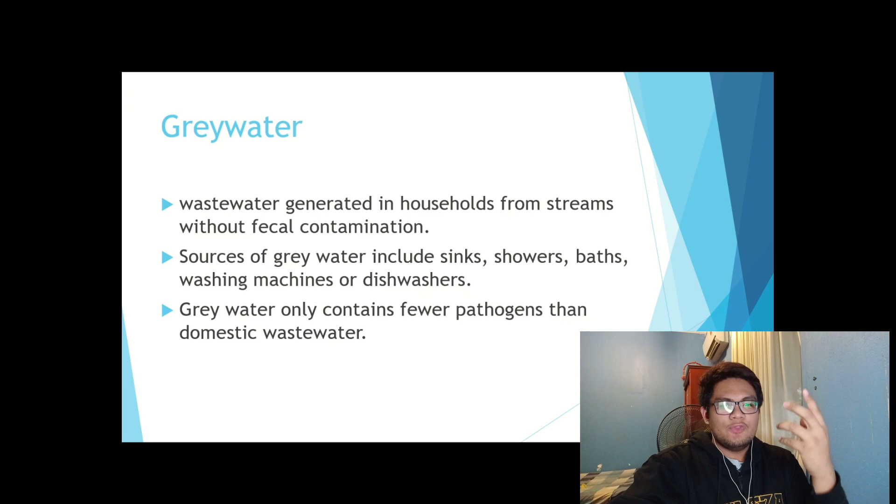For stormwater, it originates from the rain, including snow and ice. Stormwater can soak into the soil, be stored on the land surface in ponds and puddles, evaporate, and contribute to surface runoff. Most runoff is conveyed directly to nearby streams, rivers, or other water bodies without treatment.

In natural landscapes such as forests, soil absorbs much of the stormwater. Plants also reduce stormwater by improving infiltration, intercepting precipitation as it falls, and by taking up water through their roots.

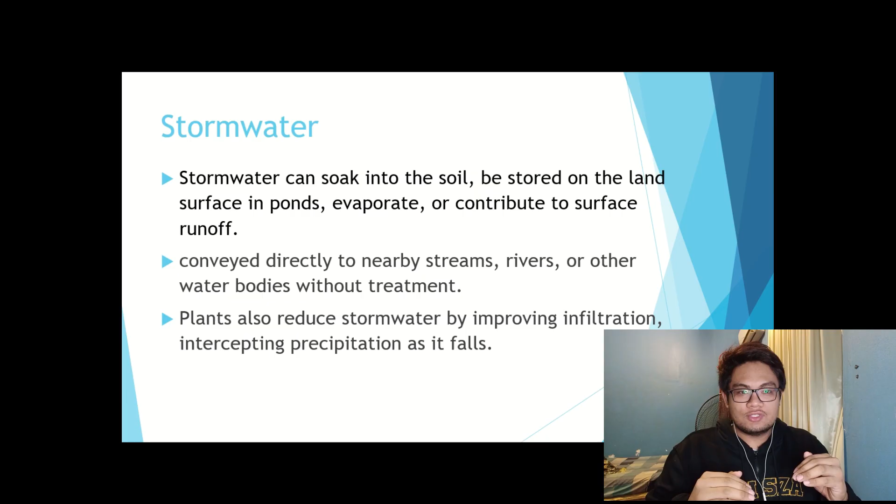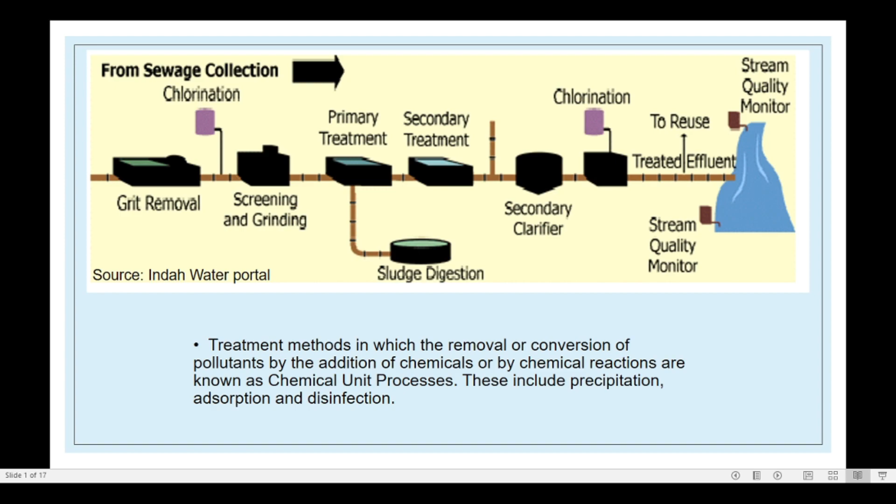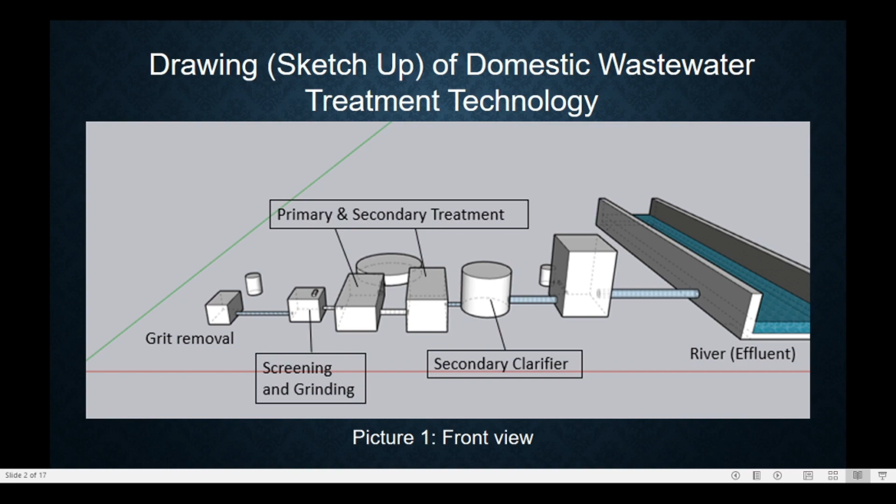For preliminary wastewater treatment, it is for the removal of coarse solids and other large materials often found in raw wastewater. Removal of this material is necessary to enhance the operation and maintenance of subsequent treatment units. This includes screening and comminution or grinding for removal of debris and rags, and grit removal by sedimentation.

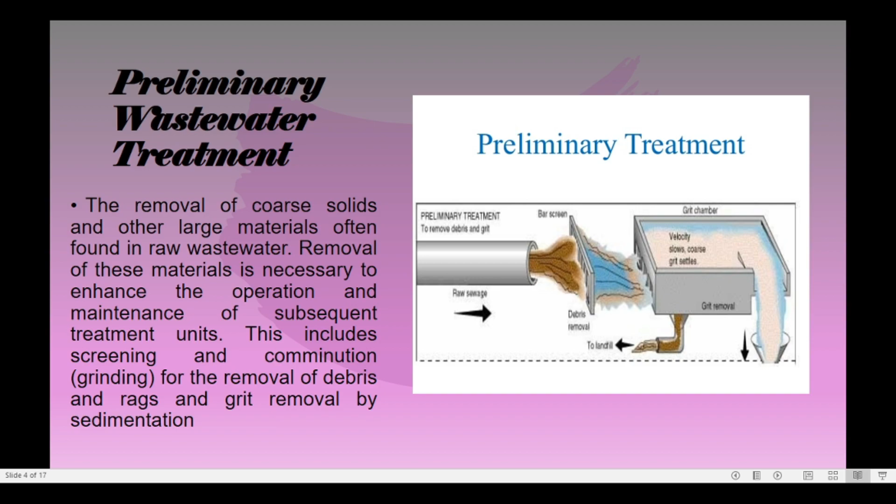For grit removal, it's used to remove sand, silt, and other heavy solid materials that are heavier than the organic biodegradable solids in wastewater. Grit removal is often found in the headworks of a wastewater treatment plant. It can also be used to remove sand from river water intakes prior to processing for potable water, used in industrial applications to remove fine abrasives, as well as being used to remove grit entrained in sludge.

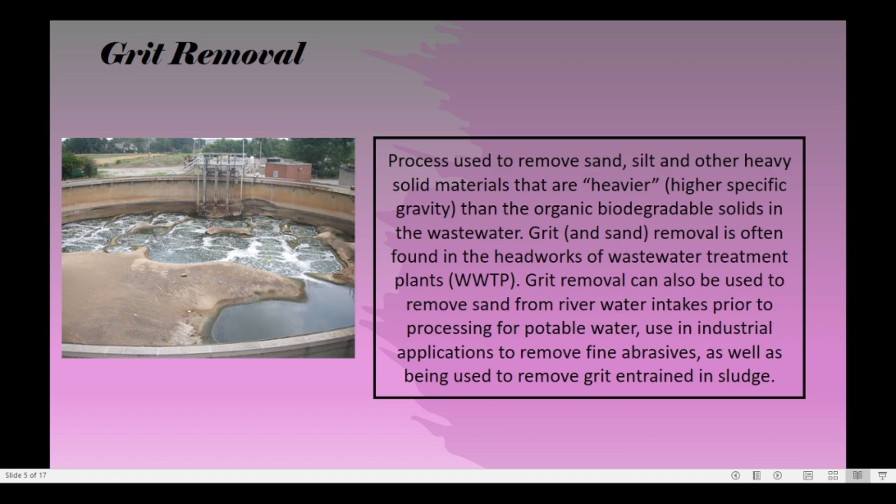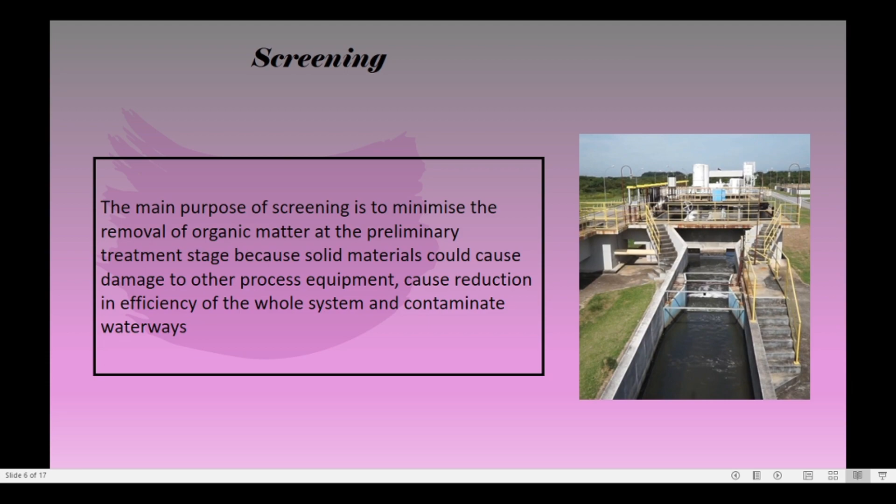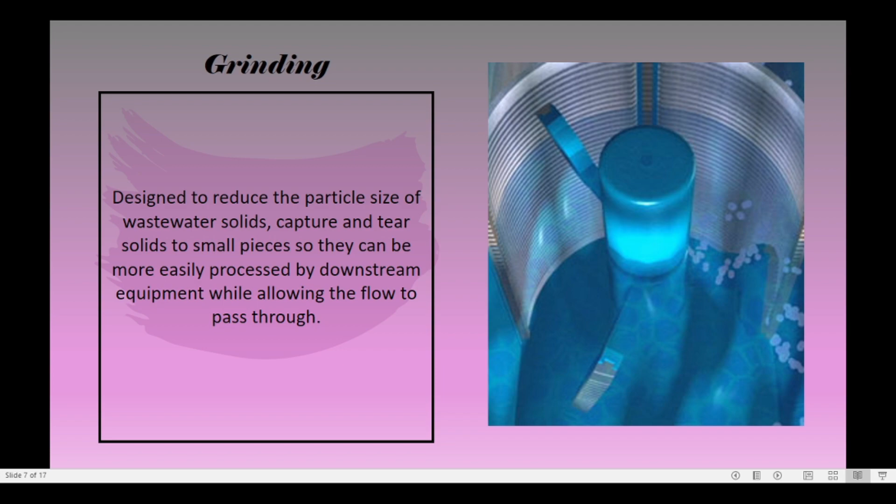For screening, the main purpose is to minimize solid materials at the preliminary treatment stage, because they could cause damage to other process equipment, reduce efficiency of the whole system, and contaminate waterways. As for grinding, it is designed to reduce the particle size of wastewater solids, capturing and tearing solids into small pieces so they can be more easily processed by downstream equipment while allowing the flow to pass through.

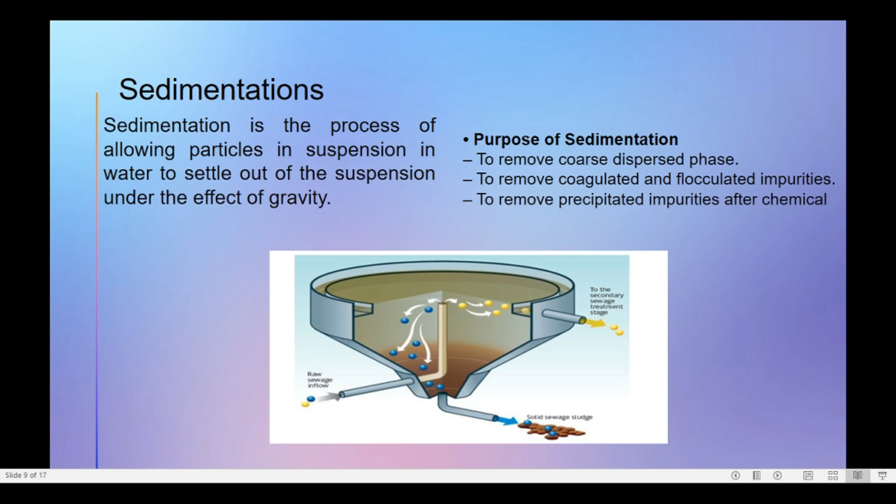As for primary treatment, we have two processes. The first is sedimentation, which is a process of allowing particles in suspension in water to settle out under the effect of gravity. The purpose of sedimentation is to remove coarse dispersed phase, to remove coagulated and flocculated impurities, and to remove precipitated impurities after chemical treatment.

The second is flotation. Flotation is a separation process based on the introduction of gas bubbles as a transport medium. Suspended particulate matter, being hydrophobic or conditioned to be so, is then attached to the bubbles and moved toward the water solution surface.

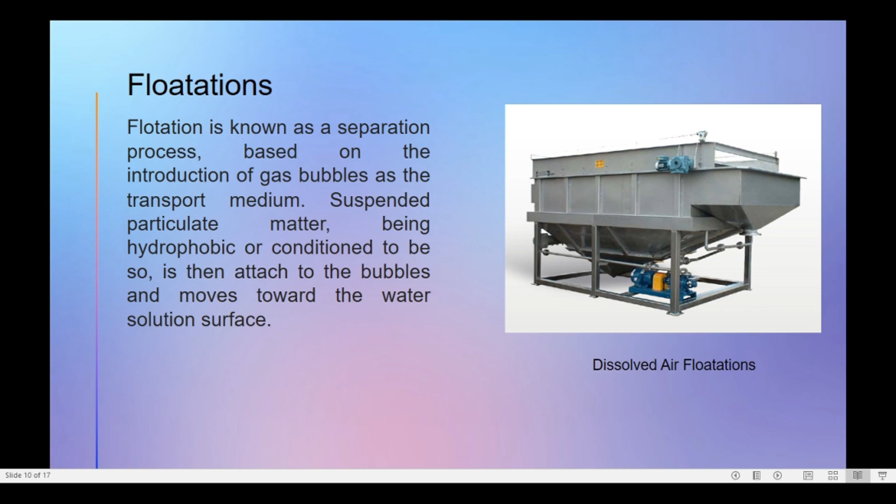For secondary treatment, there is aeration. Wastewater aeration is the process of adding air into the wastewater to allow aerobic biodegradation of the pollutant components. It is an integral part of most biological wastewater treatment systems.

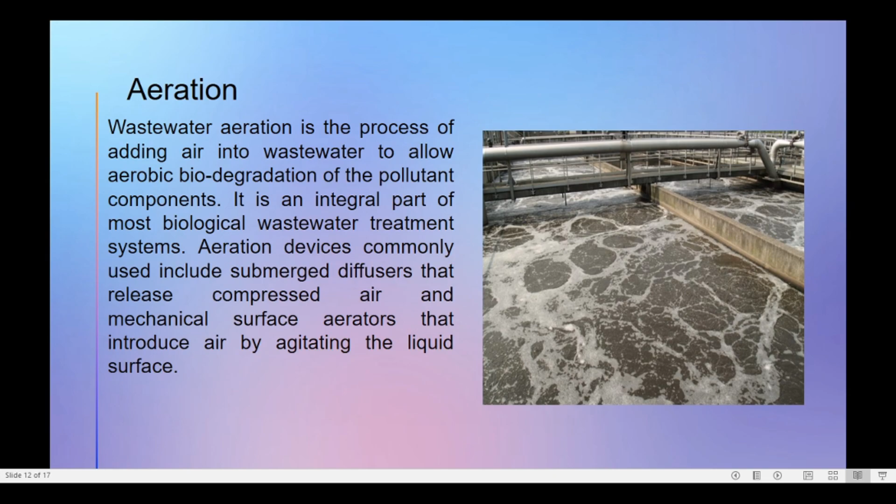Aeration devices commonly used include submerged diffusers that release compressed air, and mechanical surface aerators that introduce air by agitating the liquid surface. For activated sludge, a portion of biological sludge is recycled to the aeration basin to maintain a high mixed liquor suspended solid level. The remainder is removed from the process and sent to sludge processing to maintain a relatively constant concentration of microorganisms in the system.

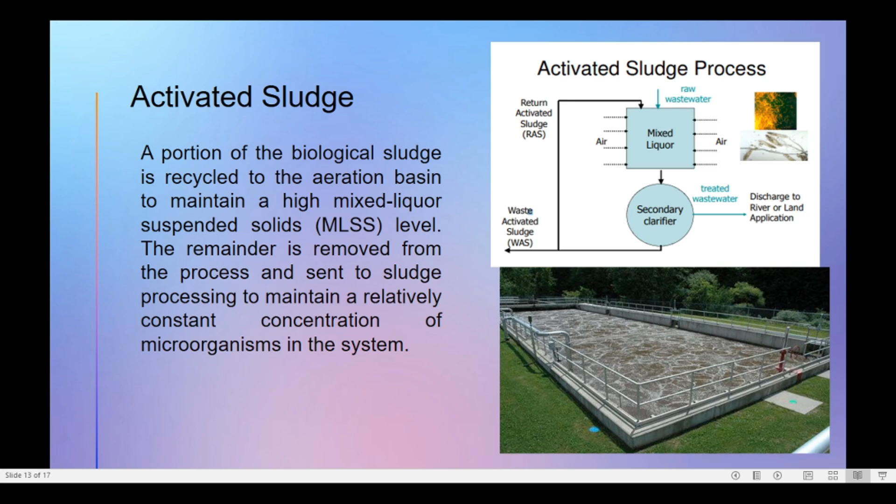For biofiltration, it is used in wastewater treatment to include all processes that combine biological purification through attached growth with the retention of suspended solids.

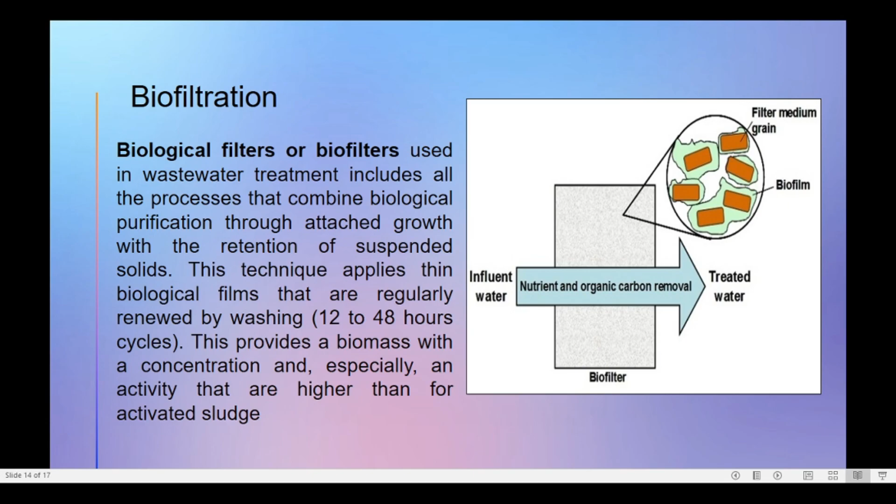For the secondary clarifier, it is used to remove the settleable suspended solids created in biological treatment processes, such as the activated sludge and trickling filter process.

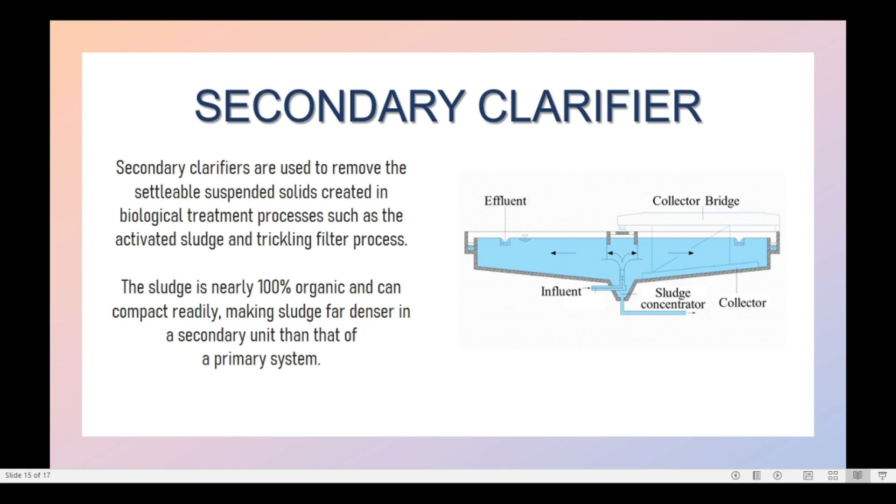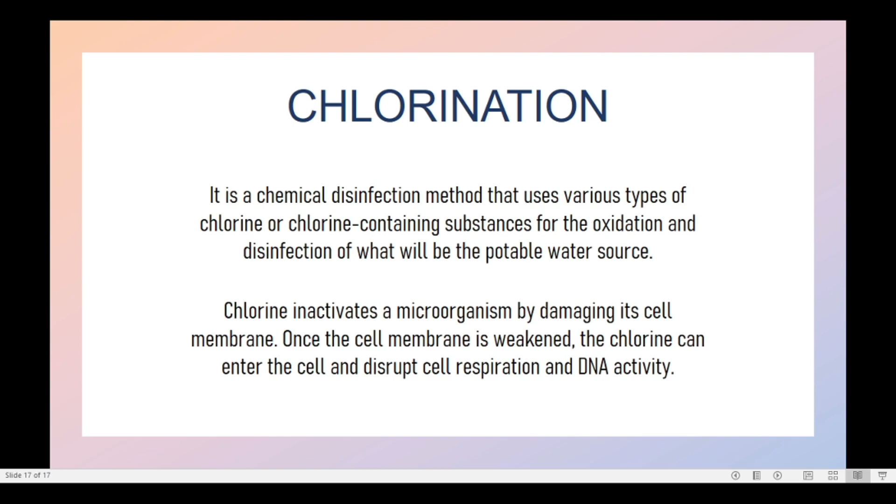For disinfection, water disinfection means the removal, deactivation, or killing of pathogenic microorganisms. Microorganisms are destroyed or deactivated, resulting in termination of growth or reproduction. For chlorination, it is a chemical disinfection method that uses various types of chlorine or chlorine-containing substances for the oxidation and disinfection of what will be a potable water source.